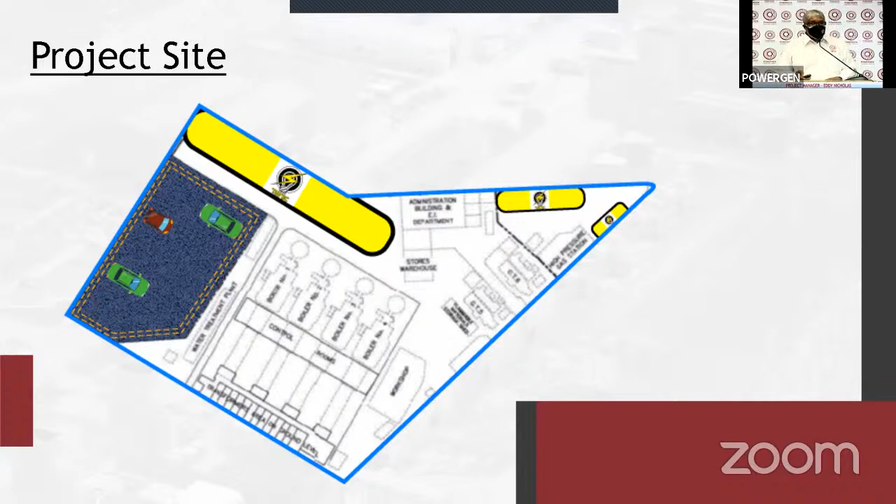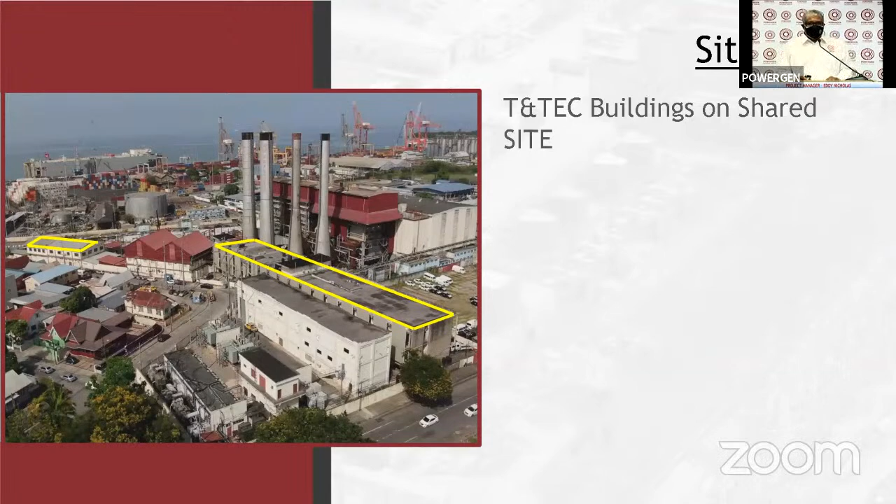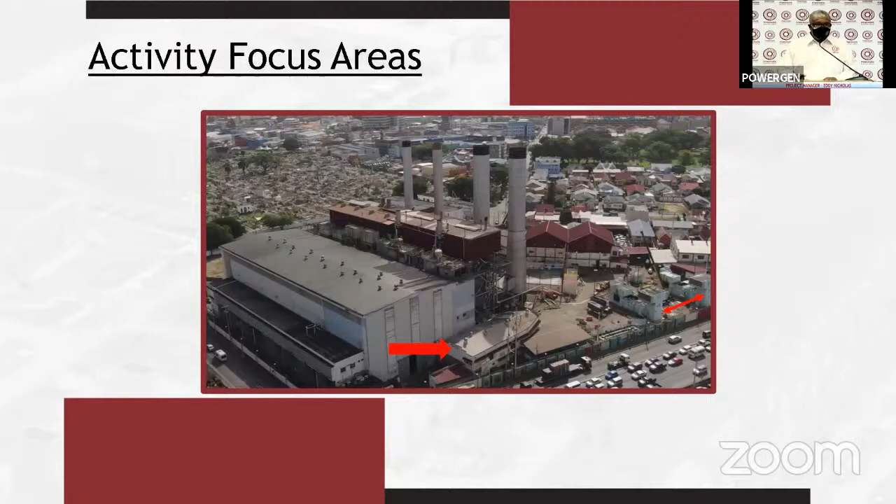Then we have the mechanical workshop. This is the area that would have been used for the technicians to perform repairs on the turbines when they were running. We will be erecting a screen just off of Wrightson Road there because of the close proximity of this building to the roadway. My project director, Mr. Todd Garrett, will elaborate further on this particular use.

And last but not least, the iconic stacks standing 53 meters, just over 175 feet, that has graced the Port of Spain skyline for so many years. They will be next to go.

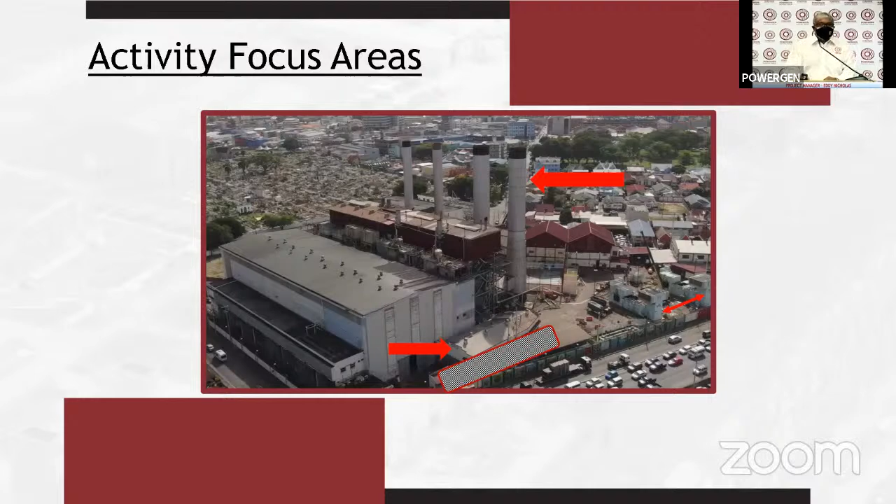So how are we going to do it? Mr. Garrett will go into some greater details, but I'm still going to share some information. The gas turbines were modular and they would be removed in similar fashion. Package units, they would just be disassembled and carted away.

The mechanical workshop is a brick and mortar structure with some steel. We're going to be using an excavator to pull those brickwork into the building, which is a common technique used in this type of demolition. We will also be unbolting and cutting hot and cold in order to get the steel members out of that building. There will be dust suppression equipment, which will be elaborated on by Mr. Garrett, just in case we have dust on the facility.

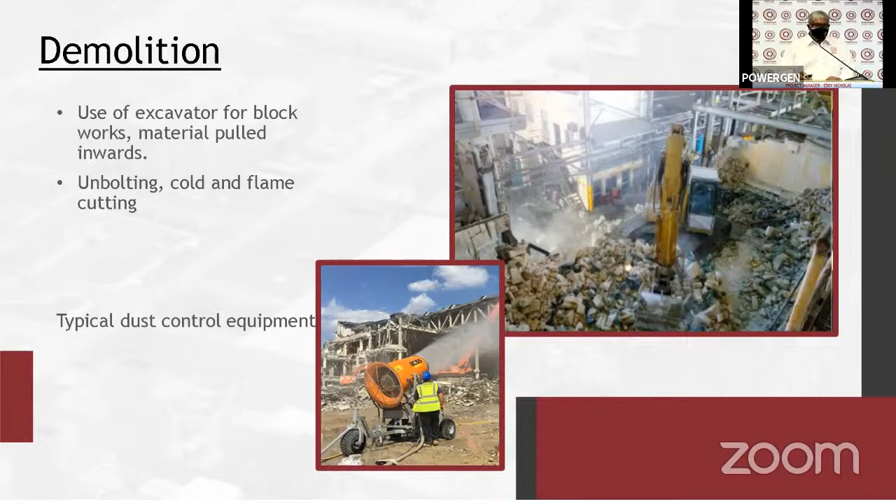As in any demolition project, we expect that there will be some level of noise. But the level of noise that is expected will be well within the conformance and consideration of safe limits by the EMA. My colleague Anika Little, the HSE coordinator, and Mr. Garrett will expand on this in terms of our controls and protection systems.

To reiterate what was said previously by the general manager, we continue to work collaboratively with the appropriate state agencies and regulatory bodies to ensure that we are fully compliant on all aspects of the plan for this phase 2 operation. You can be assured that our commitment to do this right and to minimize any disruptions to residents in our home community would be looked after.

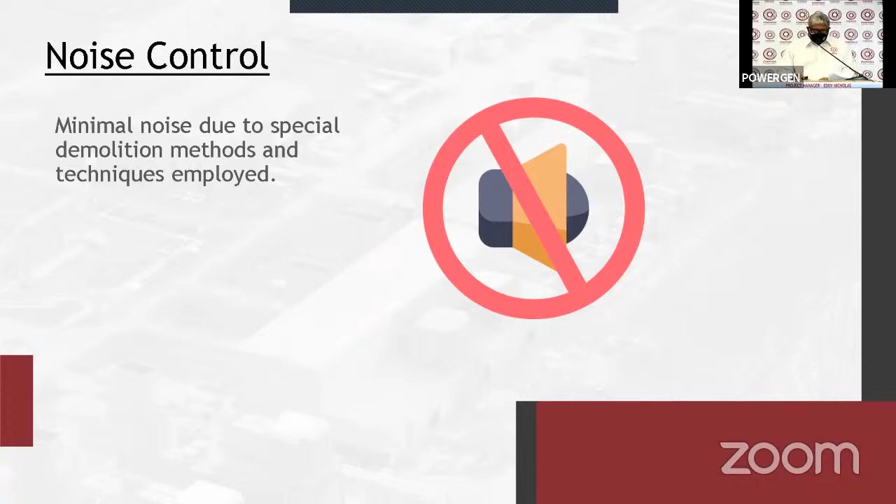We have sought and secured approvals from the Environmental Management Authority and the Port of Spain City Corporation. We have notified our partners, the Ministry of Energy, Ministry of Transport, Trinidad and Tobago Fire Services, T&TEC, and the National Gas Company, who resides on the side of the Port Authority. These entities were all informed so that we are all on board together. This extensive collaboration has allowed us to have a very coordinated approach on how we conduct the demolition and dismantling on the site.

This work will begin in August, as indicated, and we will continue through 2022. During that time, we'll be employing all the necessary protocols on site to ensure that we produce a clean product in terms of the demolition, and there will be no issues. I will be happy to answer any of your questions after this presentation. Thank you very much for your attendance and for listening.

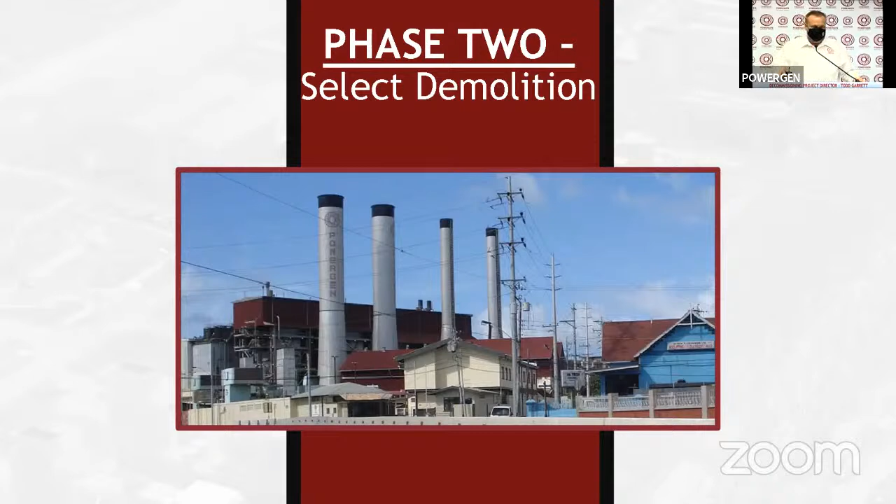Dust is always a concern. As you've seen so far, dust has been very minimal. And again, with the activities we'll be doing on site, the dust will be very minimal as well. As you can imagine, cutting steel with a torch doesn't create a lot of dust.

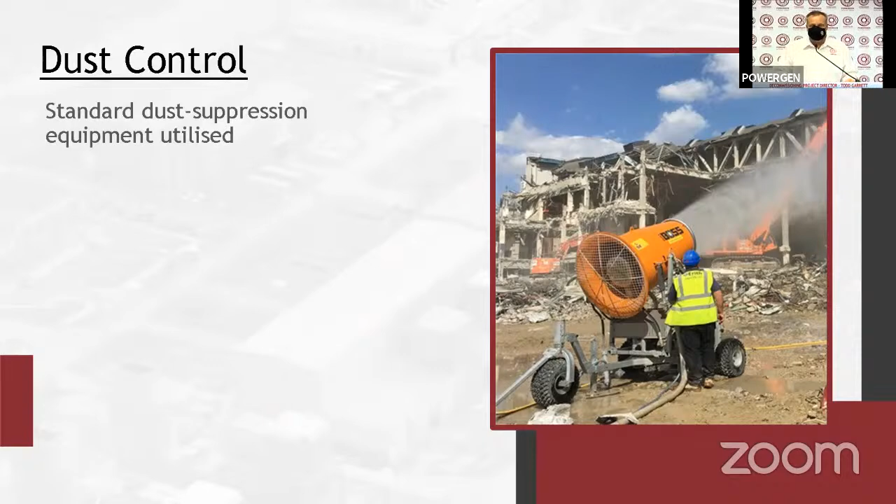Where we do come in contact with dust is, as Eddie mentioned earlier, right along Wrightson Road we've got the mechanical workshop. That's a concrete block building that'll have to come down. To control the dust, we're going to put a screen up to block any material that could come in contact with the public. It's precautionary, probably not required, but we want to go the extra length to make sure everything's protected. Water will be used to spray the blocks as they fall to the ground, which will keep dust very, very minimal.

Traffic, again, this will not be a traffic impact in any way. An average of probably 1 truck per day. The biggest issue we will have would be moving the cranes onto the site to remove the stacks, and that won't cause any disruption at all.

And then finally, our final phase of the project will be the remediation. That won't start until we complete the demolition, which right now is scheduled for sometime in the first quarter of 2023, barring any additional COVID restrictions. That's our plan for getting the site clean of any environmental contamination.

With that, I'll take any questions in the question and answer period, and I'll turn this over to Anika Little. She is our HSE coordinator for the project. Thank you.

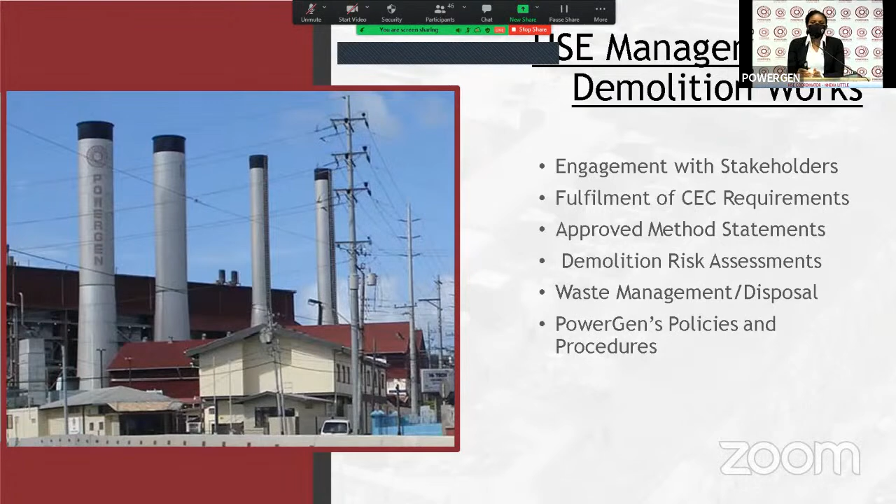Another overarching point I want to stress is that even though we have contracted a specialized contractor to perform the process on our behalf, PowerGen will be supervising. The works will proceed according to our policies and procedures. PowerGen will ensure that the work continues in a manner that is environmentally friendly and that ensures there is no risk to you, the public.

Okay, so this is my last slide, and this is emergency response. I spoke a little bit about fulfilling our CEC requirements, and one of those requirements was that we prepare an emergency response plan. So we have an emergency response plan for the site, and this was also submitted for regulatory approval.

The emergency response plan has 3 different levels. Similarly, the emergency response plan for our first phase had 3 different levels as well. And when we came to you at that point in time, we promised you that there would be no level 3 incidents and no level 2 incidents. So let me explain a little about what the levels are. A level 1 incident is an incident where there is no immediate danger to the public, and the incident does not extend beyond the boundaries of the power station site.

A level 2 is where there is potential risk for the public and the environment, and there's also a great potential for that incident to extend beyond the boundaries of the power station site. A level 3 is an incident where there is immediate danger, immediate risk, and immediate hazards to the public, and that incident does and will extend beyond the boundaries of the power station site.

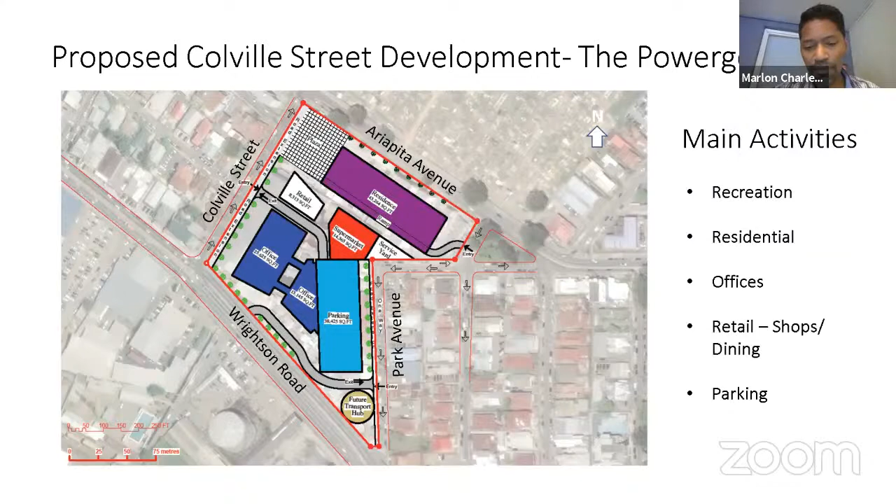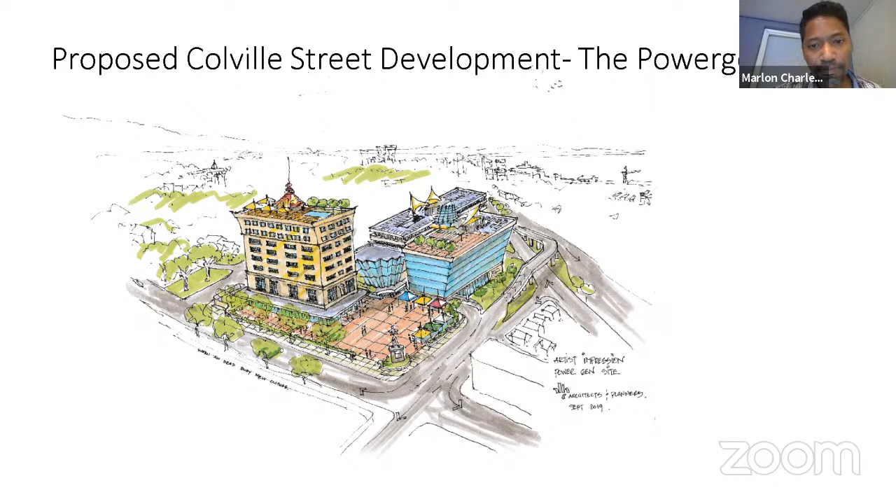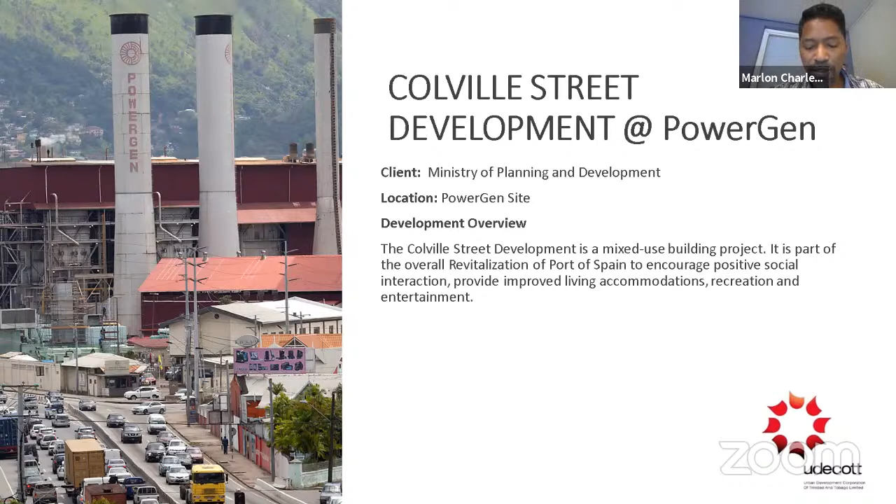The next slide is next steps. So the next steps for this project are that we'll be holding some public consultations to get feedback from stakeholders to get their input on this project. We will conduct social and financial feasibility studies to assess the viability of the project. Then we will develop our conceptual design and obtain investment through the private sector.

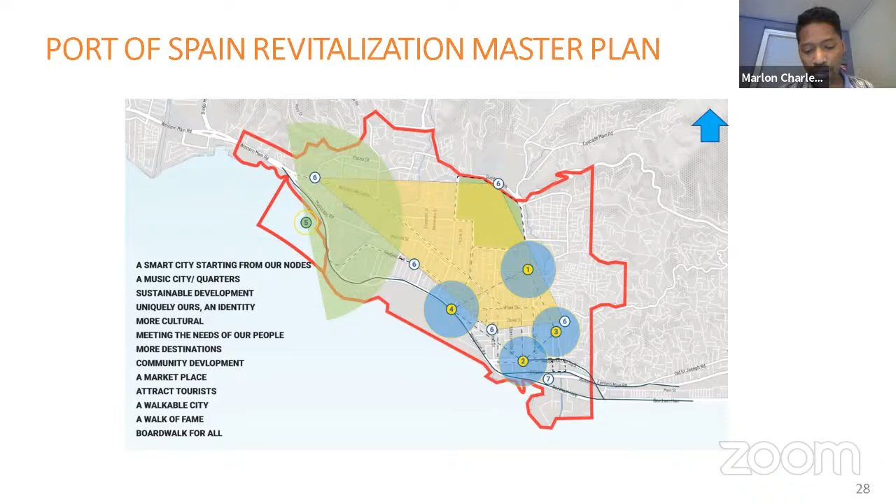This slide actually refers to the overall Port of Spain Revitalization Master Plan. The red line indicates the boundaries of Port of Spain, and the blue highlighted areas are our key mixed-use development projects, of which this PowerGen site is one. On this site plan, item 4 represents the PowerGen site. So that's it, thank you for your time. I'll pass you back to the moderator.